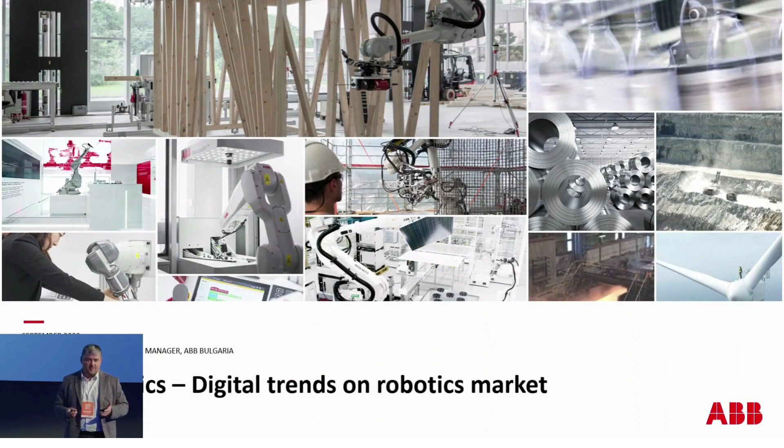Well, my name is Aleksandr. I'm a representative of ABB Bulgaria. And today I wanted to briefly show about our company and about digital trends, what we have right now.

Just briefly about ABB Robotics. A lot of people maybe know about ABB chargers, ABB smart home, but not so many people know about ABB Robotics. If nobody knows, ABB is the abbreviation of ASEA Brown Boveri, and ASEA started the first robot in 1969 and 1974. From this period of time, we've spread all over the world, having factories and integration on all continents. Right now, two weeks ago, it was news all over the internet that we are investing in the Sweden R&D Center for Artificial Intelligence and Robotics.

So basically our products consist of, we can imagine as a pyramid. On the bottom are all robots, peripherals, and the software we have. Functional modules on the upper level, then goes already turnkey solutions for any kind of application and systems, and all the ecosystem surrounded with the software and everything else.

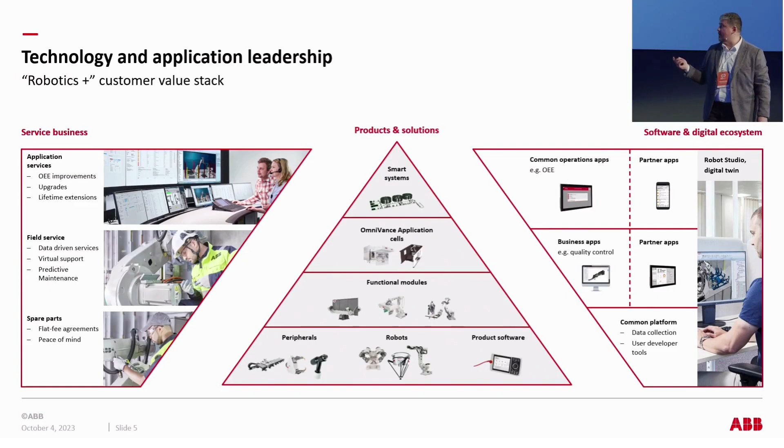And today I'm going to speak about exactly the digital software what we have. But first of all, market trends. What we have? We have four big pillars in the market trends.

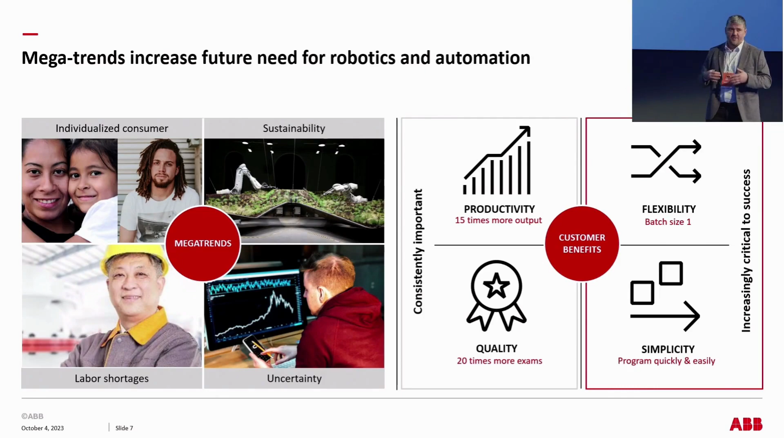First of all, everybody knows that labor shortage is the bottleneck everywhere right now. Uncertainty - everything is not predictable right now, and things are going on. At the same time, the individual consumer - everybody wants something specific, unique, a unique smartphone, unique car, but at the same time it should be produced on the one conveyor. That's why robots cannot be just productive and reliable with good quality. They should also be flexible and simple to use.

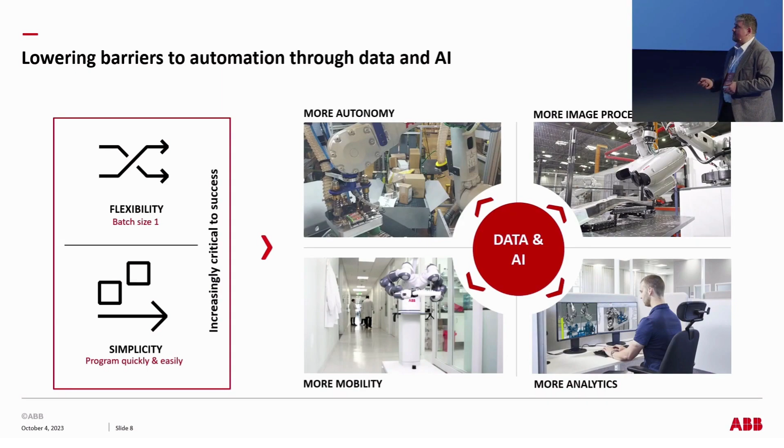How will we bring this simplicity of use and flexibility into the market? We will, of course, use data and artificial intelligence, together with vision systems, analytics, mobility, etc. And what are the tools right now? Today I'm going to present this to you in a 'George' way.

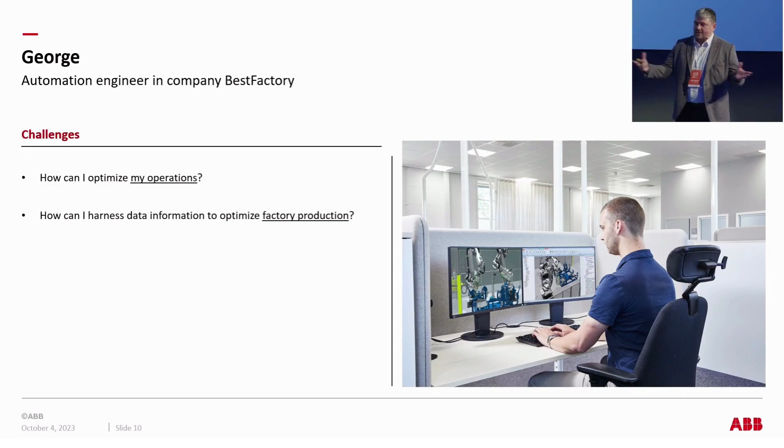So imagine that there is someone named George. George is an automation engineer at some factory, the best factory. And he's thinking about how he can improve productivity on his factory. First of all, he needs to imagine what he should do in this specific area, on this specific production operation. Then he should put this imagination into virtual reality.

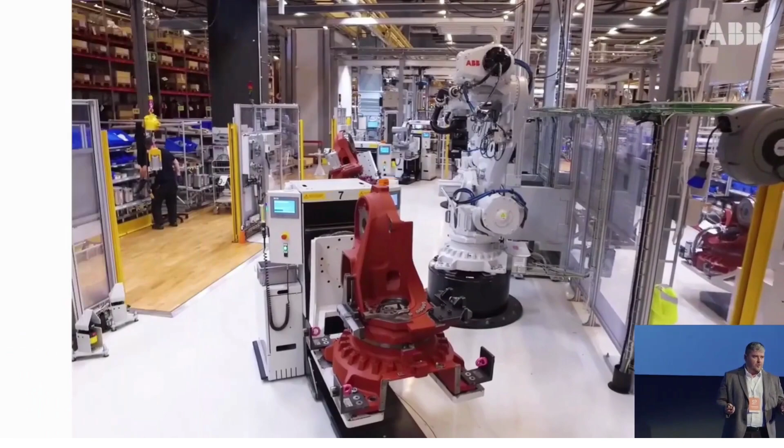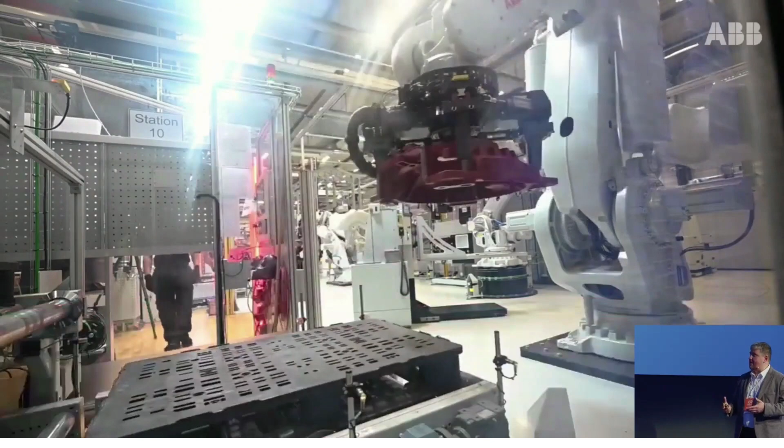And here we go with our tool, which is called Robot Studio. Maybe somebody heard about it. Actually, this is the first studio of digital twin, which was brought to market in 1998. It was the first ever software for this kind of solution. Now we've developed it so much that the virtual reality digital twin is exactly the same as the real cell of the robot.

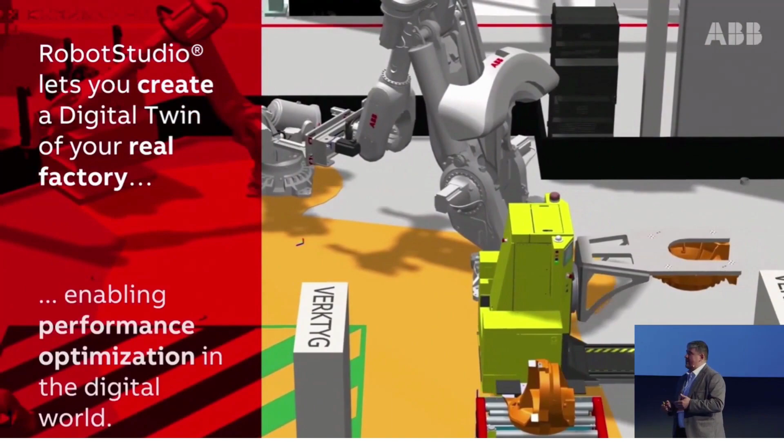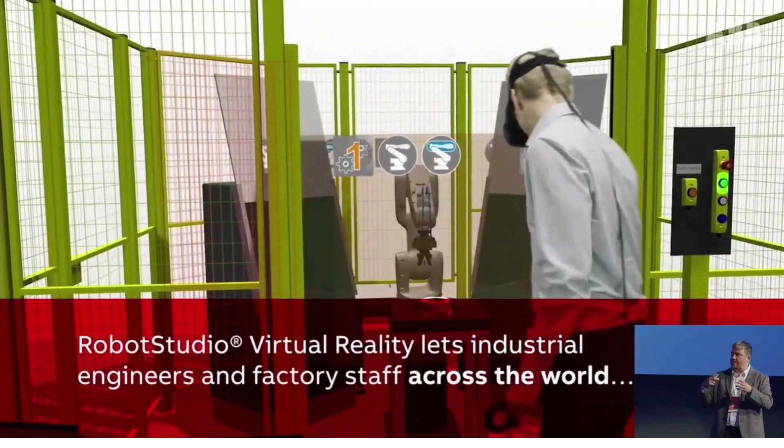So actually with the digital twin, you can put your imagination into a virtual program. You can do whatever you want with your cell, try and test whether the robot fits into your program. Of course, we added virtual reality - you can put your imagination into a virtual reality atmosphere and see the robot at full size. You can go with augmented reality, etc.

But next thing - how can I program the robot if I don't have programming skills? Okay, and here we go with Robot Studio Tutorials. Today in Robot Studio we will learn how to create a collision-free path.

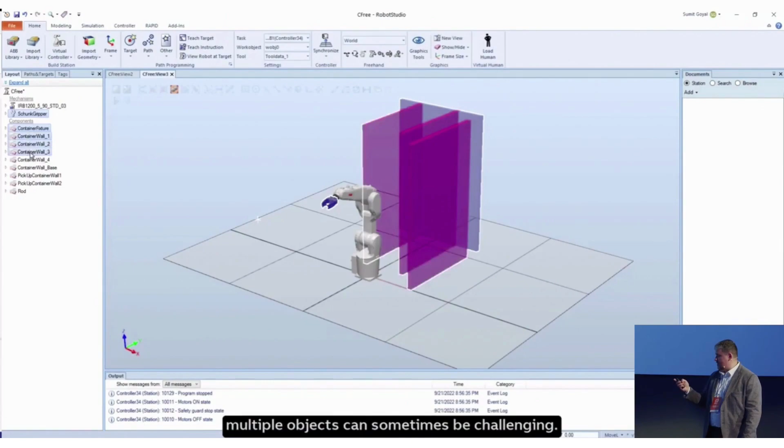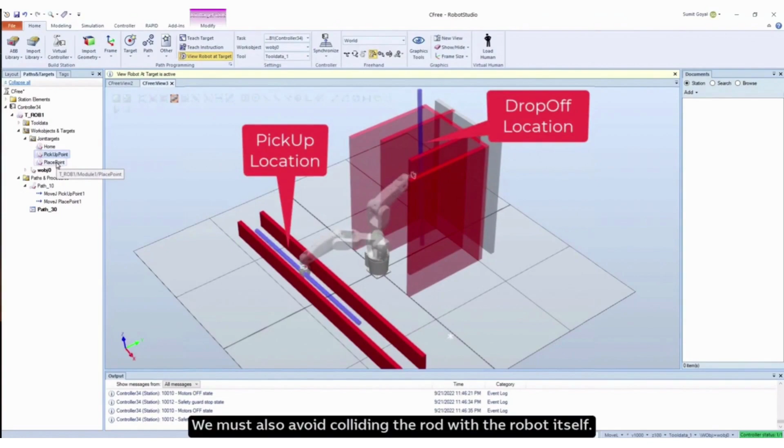Creating a path in an environment containing multiple objects can sometimes be challenging. Let's look at this station. We have our robot IRB 1200, with a gripper tool holding a cylindrical rod and multiple objects in the station. The red walls are obstacles, which we must avoid while the cylindrical rod is picked up from a defined location and placed at another.

We must also avoid colliding the rod with the robot itself. If we had to create a path manually between these two given locations, it would really get challenging. Avoiding the rod colliding either with the robot or the objects around surely feels complex. The collision-free path feature is powerful yet simple to use, which makes it easy to achieve collision-free paths.

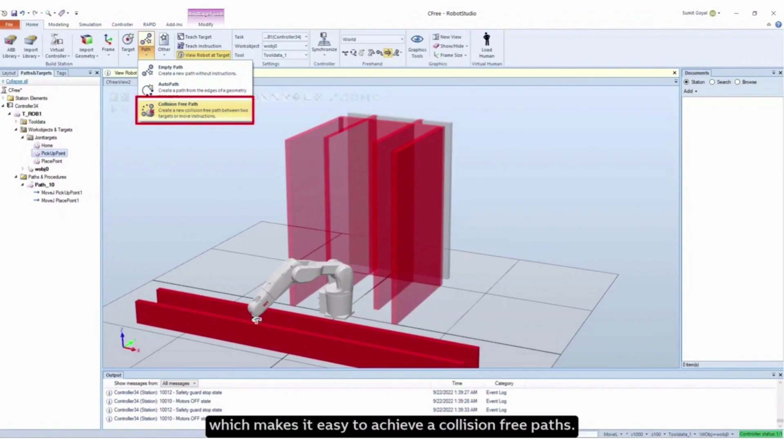To create a collision-free path between the two shown frames, select them in the tree view. Right-click the selected frames and click Create Collision-Free Path in the context menu. To modify the start or end target, select it and click any target or move instruction in the tree view.

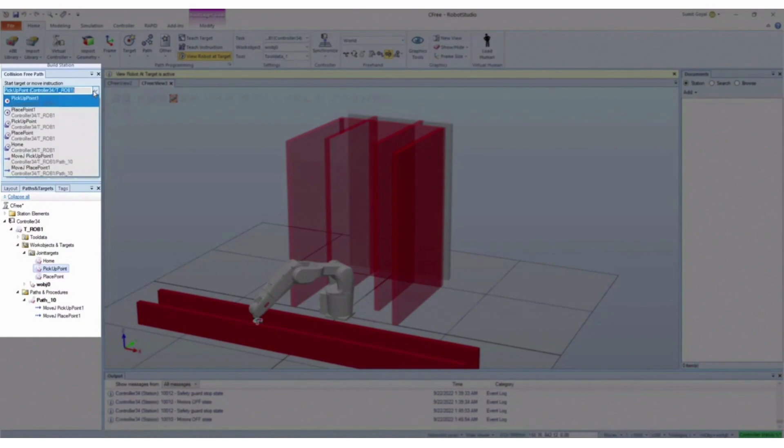Specify minimum distance to obstacles and the minimum robot self-collision distance. Specify the speed of the TCP in the generated instructions in the drop-down. Click Create.

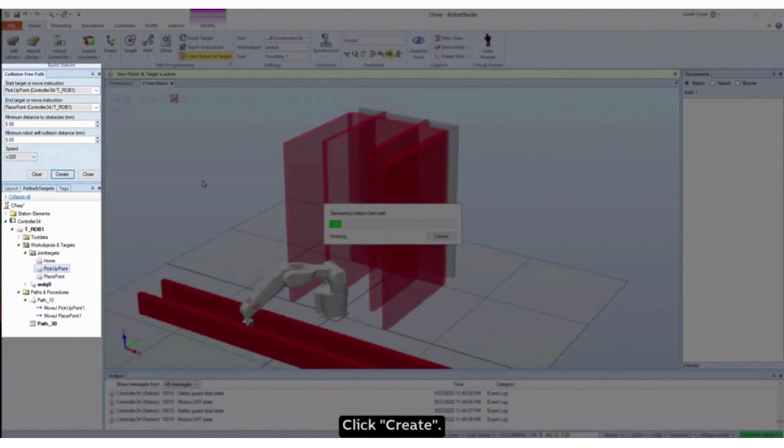The path has been automatically generated so that the robot, tool, and the load does not collide with the objects around.

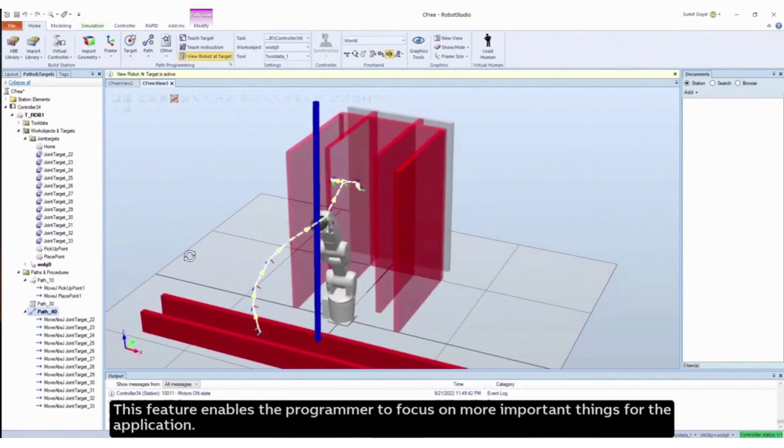Right-click the path and select Move Along Path. Collision-free path also results in shorter and smoother paths. This feature enables the programmer to focus on more important things for the application.

We can also create a collision-free path from the ribbon menu. Go to Path.

Okay, I will stop here. This was just one of the tutorials we have, of course, freely available. But I wanted you to see how easy we can program any robot from just a software on our PC.

And then we can download it into the robot. And how can we download it? We made not only this kind of software installed on PC—we made a cloud, a cloud of the robotics software available everywhere.

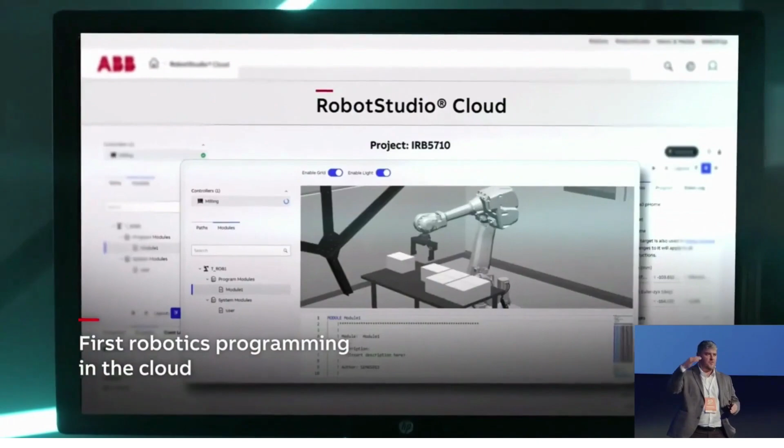So you can have an advanced engineer from Sweden working on programming your robot here in Bulgaria at a distance, just in the cloud. And everybody can see one program of the robot everywhere in the world. Who made this? Who made that? Who made any adjustments on the robot on the market, on the factory?

So this is the first ever tool on the market we have, and this makes life really easier for any kind of factories where robots are installed, because before that we always had different kinds of problems. Somebody would just make some adjustment on the robots and make errors, and then stoppages.

Everything breaks, and then the qualified guy should go there and check. But with this cloud, we can do it remotely.

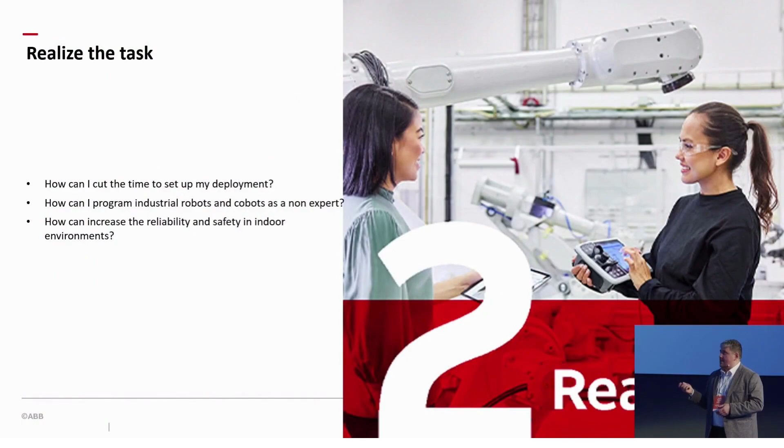Okay, next thing, we need to realize the task. How can we do it? Also with the software.

This RobotStudio adjustments, what we have for different kinds of applications, like arc welding, assembly, plastics, 3D printing, painting, whatever—so it's just additional add-ons to the software.

For example, there is a new wave of robotization right now in the construction market, like 3D printing—if you maybe saw in videos, the robot printing houses, all the elements of the house. By this tool, you can just download your 3D image, and the program will make automatically, just for the robot, in seconds, how it will be printed.

And different things like that. But more than that, okay, if you just want to touch the robot and really program it, it will make it easier also with additional software inside the robot, which is wizard programming.

And can you... So we're launching something really exciting.

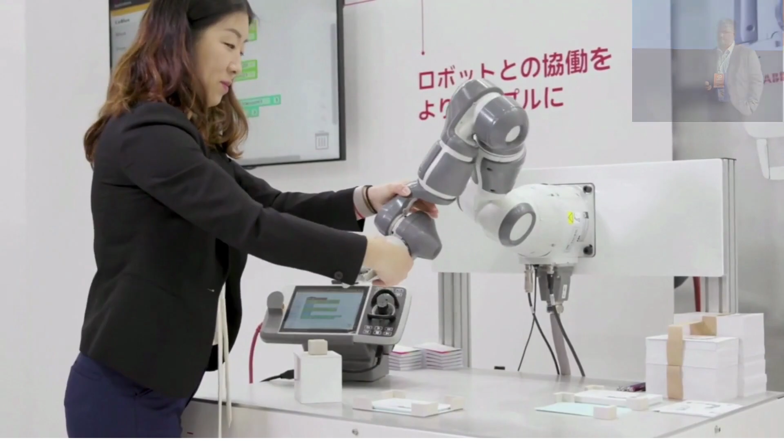This is a graphical, easy programming method for single-arm YuMi. Users don't need any special training. This graphical programming method is very intuitive.

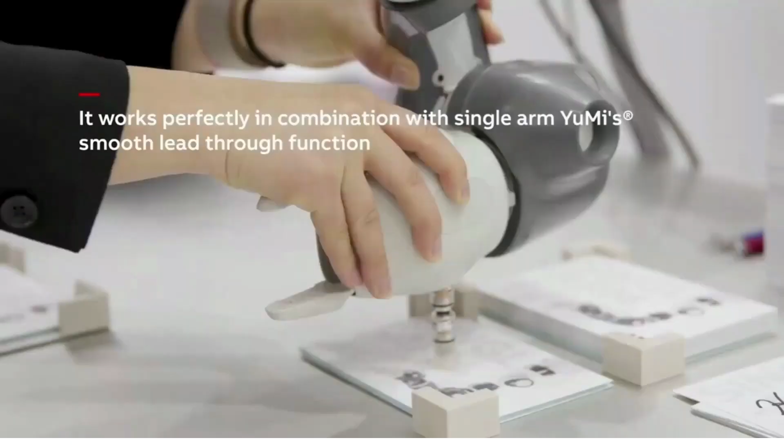What we have done is we have created a graphical layer based on blocks above our RAPID programming layer. Users don't need any special training. This graphical programming method is very intuitive.

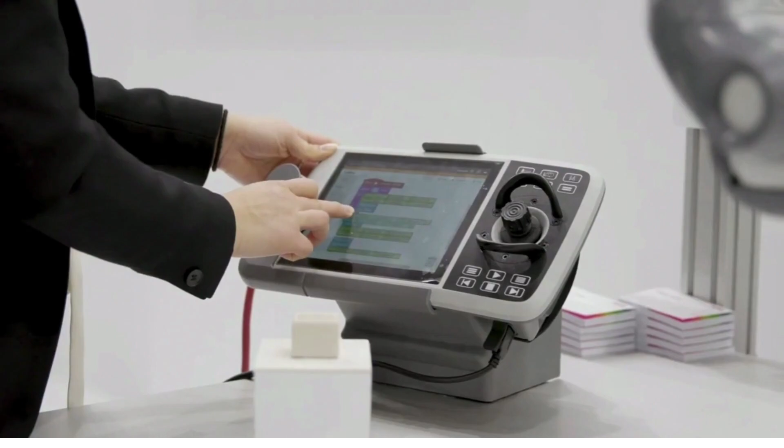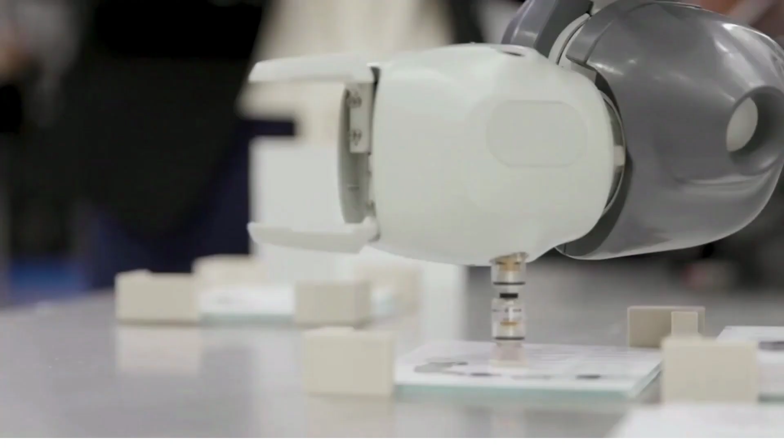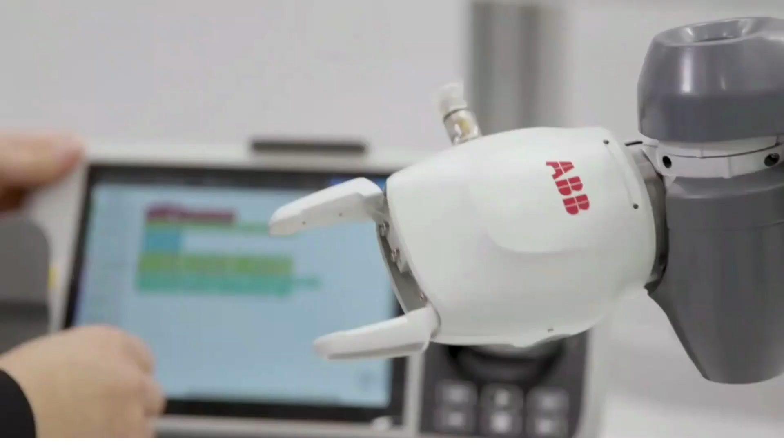So YuMi has a multifunctional smart gripper with vacuum, with servo fingers, and with vision. So it's one package ready to go. Here at ABB, with our collaborative robot portfolio, we're able to collaborate with humans really closely while keeping a high and productive working speed.

I want to mention that we have this software also in industrial robotics as well, as an add-on. Then, just announced maybe a month ago, we introduced into the market a new software system which will help evaluate problems on the factory floor.

So, for example, if there are any stoppages, any breakdowns, and you don't know why, sometimes engineers should go to the robot or to the machine and check every movement with a timer to understand whether the problem is in the sensor or in the PLC or where.

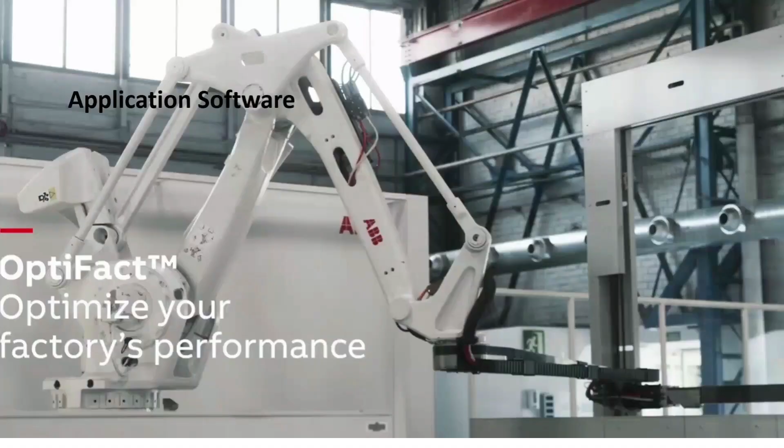By this tool, which is called Optifact, we can analyze and optimize all the operations going on in the factory. Any device, any sensor, any PLC, any robot, even not an ABB robot—anything can be attached to one system.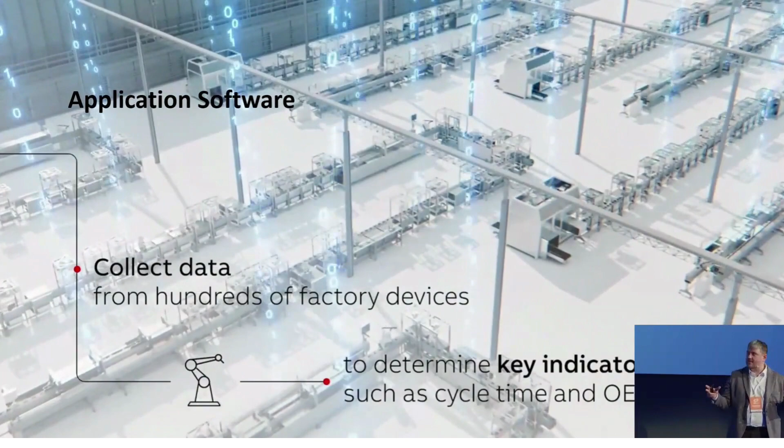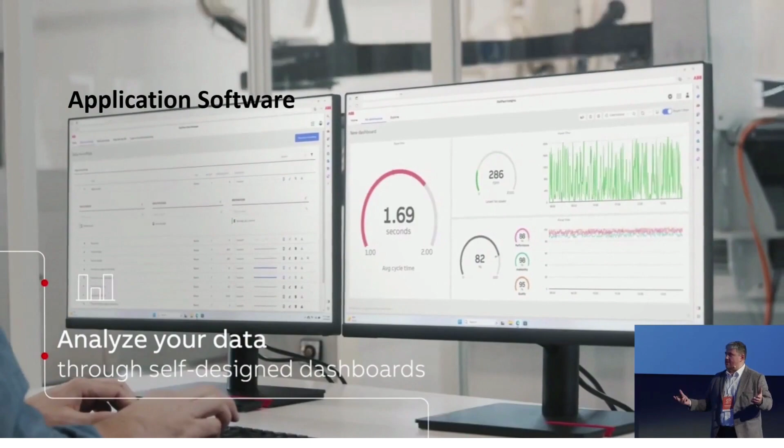You can see and collect all the data and customize your interface in the way you need in order to understand what is going on, where the problem is, and just solve it out, increasing productivity up to 25% just from the PC and one software.

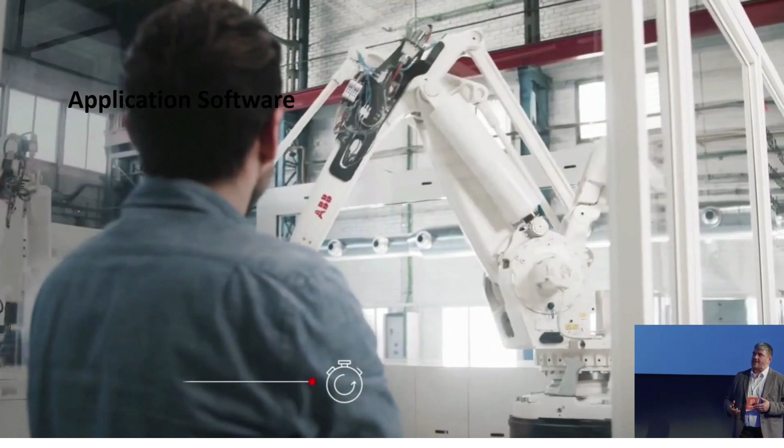So this is a really powerful tool. We are right now trying to get more practice from the market with this tool, but it's already available, for free, for some specific customers.

So, summing up, we are diving into the bright future of robotics, and digital trends will bring us there. Robots should be just a tool. You shouldn't have a team of advanced programmers. It should be just a simple tool to use, and this is what we're aiming for.